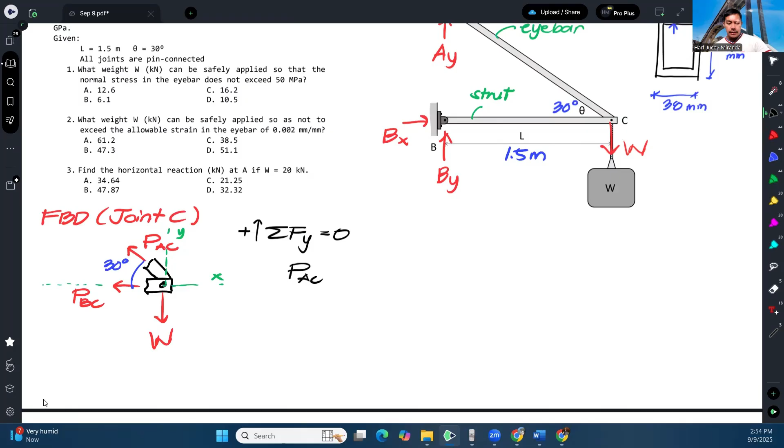Okay, so lagyan natin ng axis. Ito yung Y. So, here, dahil yung system of force niya is concurrent system lang, we can just apply summation of forces. Taking summation of forces, unahin ko na yung Y is equal to 0 kasi masasolve ko na kagad yung AC. So, we have PAC sine of 30 minus W is equal to 0. So, therefore, W is equal to PAC sine of 30.

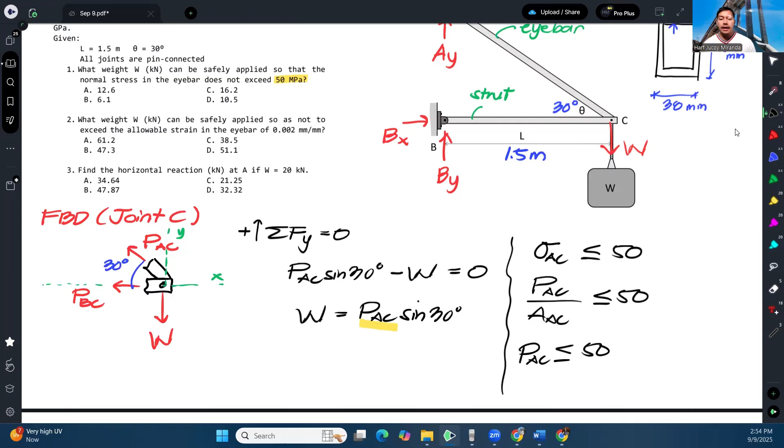Ano ba yung area? Kung babalikan natin yung cross-section, since 3 mm yan, we can define this height, yung inner area. So 76 minus 3 minus 3, that is 70. While ito naman, 38 minus 6, so 32. So ang area nung cross-section ay 76 by 38 minus 70 by 32.

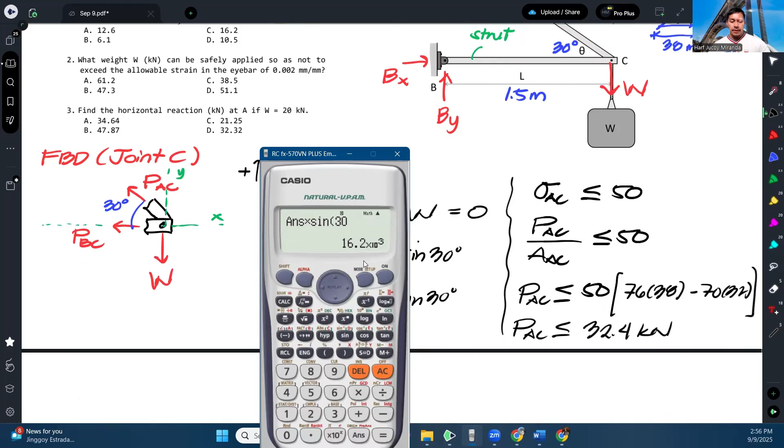And that gives us the maximum allowed force in eyebar AC. So that is 50 times 76 times 38 minus 70 times 32. That is in Newton; in kilonewton, that is 32.4. So dapat hindi lalagpas yan yung force sa AC para hindi ma-exceed yung stress na 50. So therefore, W will be 32.4 times sine of 30. So W should be limited to 16.2 kilonewtons. And that would be our answer for number 1.

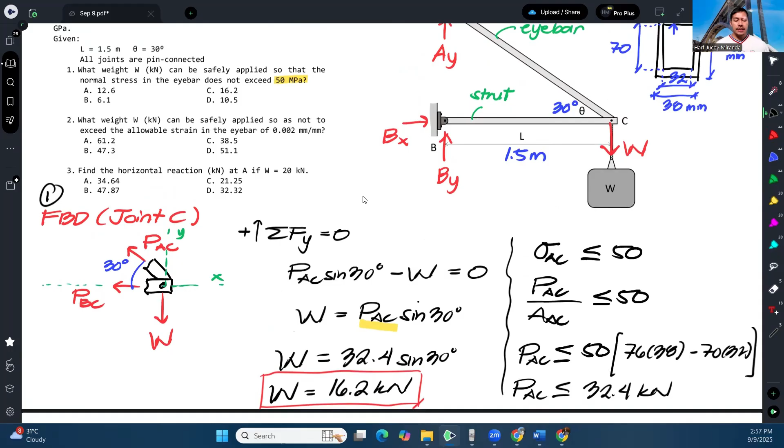Okay? Number 2, what weight can be safely applied so as not to exceed the allowable strain in the eyebar of 0.002? Ano daw yung maximum weight para yung strain dun sa eyebar hanggang 0.002 lang. So strain ni AC is limited to 0.002.

So once again, ano ulit yung strain? That is the deformation over the length. Kapag sinimplify, deformation ay PL over AE, over L, magka-cancel lang yung L. So the formula for strain can be derived as P over AE. Kung gagamitin ko tong strain ni AC, dapat hindi yan lalagpas ng 0.002. And from here, we can once again define ano dapat yung force sa AC.

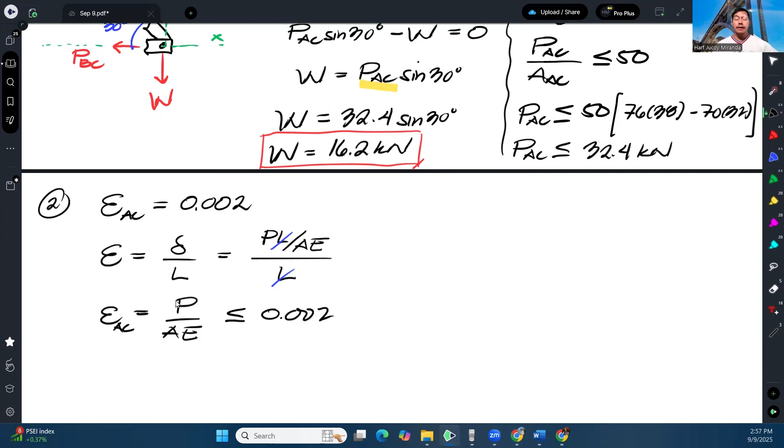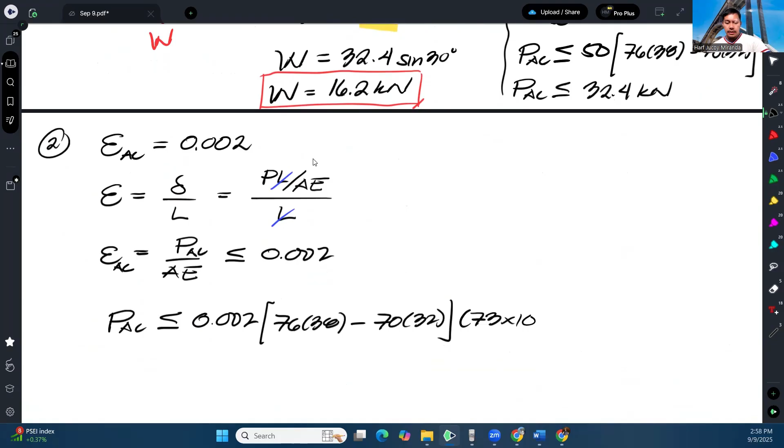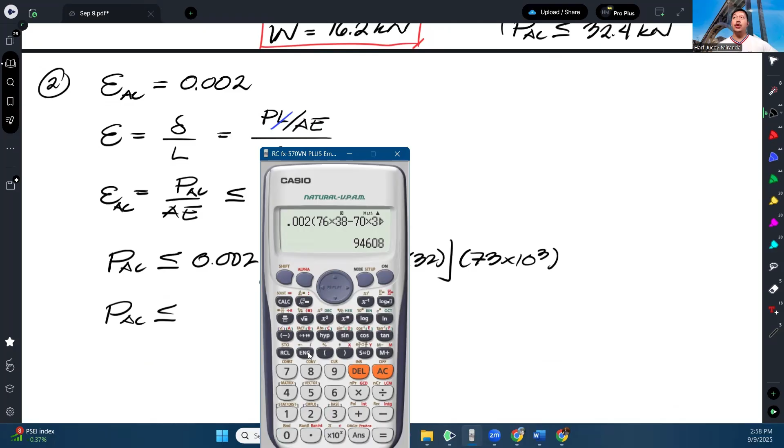So, yung force sa AC should not exceed 0.002 times area times E. Yung E na binigay ay 73 gigapascals, so 73,000. So PAC should not exceed 94,608 Newton, or in kilonewton, that is 94.608 kilonewtons.

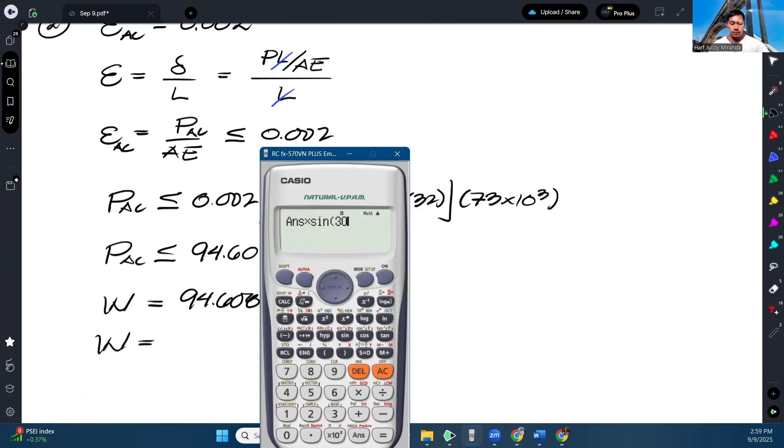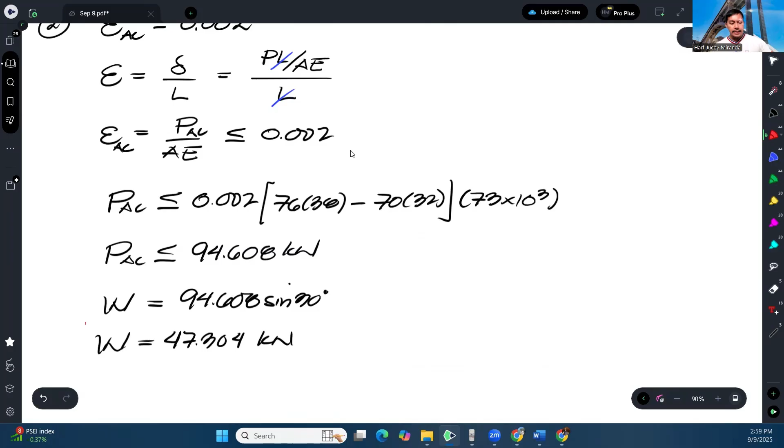And para masagot ulit natin yung W, ito pa rin yung relationship. So therefore, W is equal to 94.608 times sine of 30. So W must be limited to 47.304 kilonewtons. So that will be our answer. Yung una, 16.2.

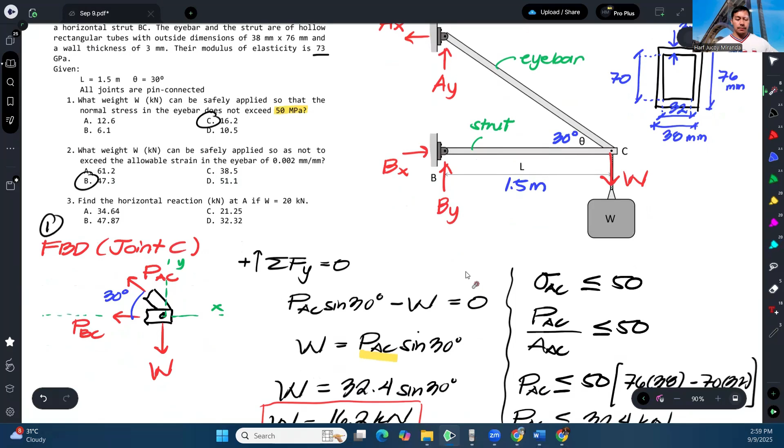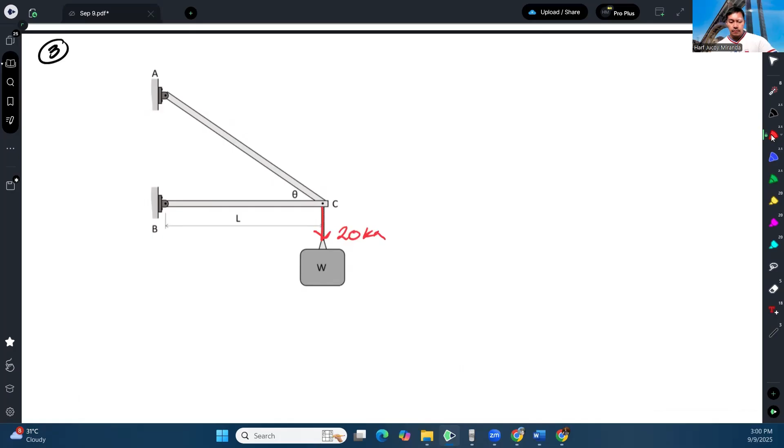Now, for the third question, find the horizontal reaction at A if W is equal to 20 kilonewtons. So, ano daw yung horizontal reaction sa A? Ito, hinahanap to. Ang binigay sa atin is what if yung W is 20? So let me just have another figure for number 3. Let me use the entire structure. So, ito, 20. So again, meron ditong reaction.

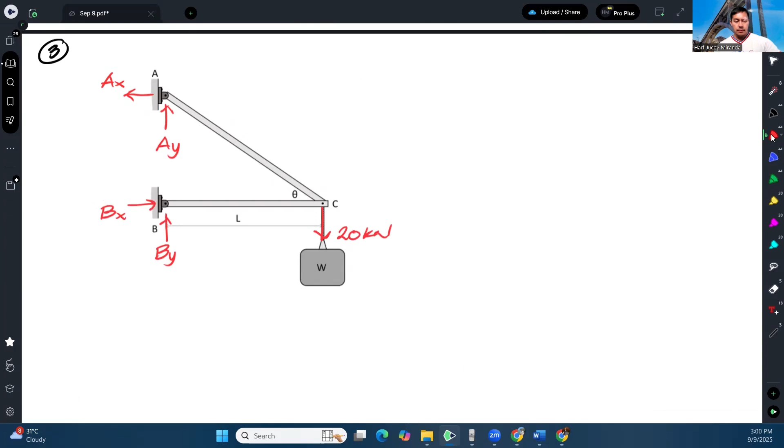Okay, and then this measurement is 1.5 meter. This is 30 degrees. So napakasimple lang ng tanong sa number 3. We can just solve for this reaction kasi di ba sabi niya horizontal reaction eh. So meaning sa case natin yung AX.

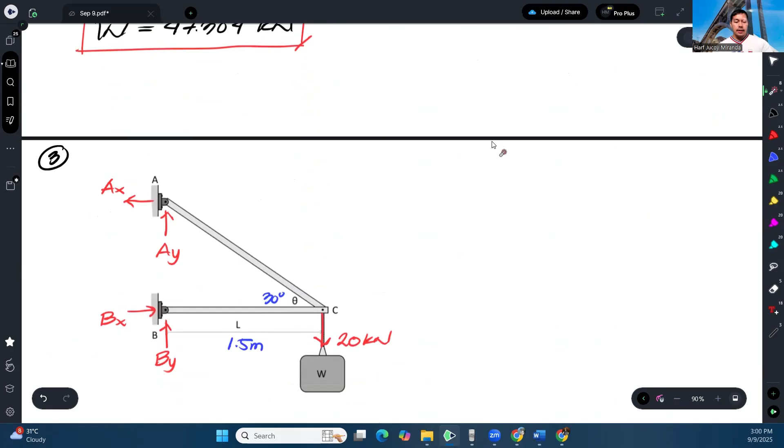Okay, so para makuha yung AX, if you look at the figure, pag nag-moment ka sa B, kuha mo na kagad to, di ba? So pag nag-moment tayo sa B, iikot to. Ang moment arm mo ay ito. And then iikot to, ang moment arm natin ay ito. So kailangan pala natin to. Yan. Tawagin kong Y. So para makuha yan, we can just consider this right triangle.

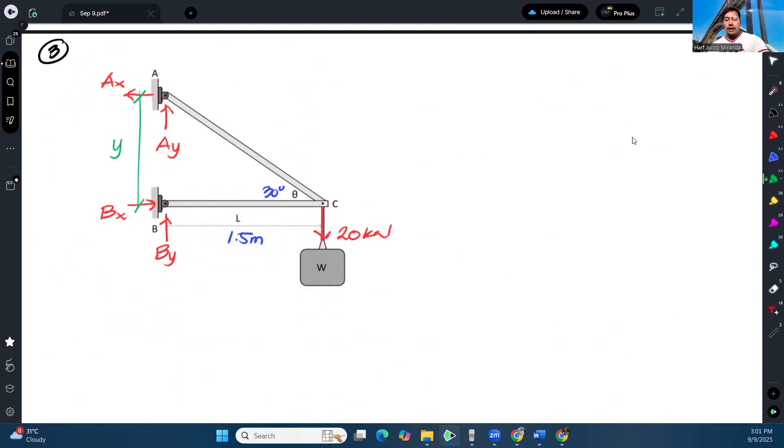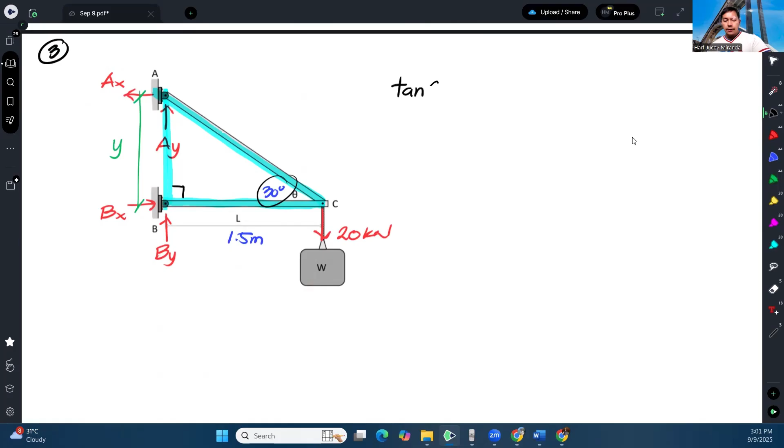That's a right triangle. And may angle ka naman. So you can apply tangent function. So tangent of 30 would be equal to Y, opposite over adjacent. So Y is 1.5 tangent of 30. So kahit wag na natin computein. So now we are ready to take summation of moment at B to directly solve for the reaction AX.

So taking summation of moment at B is equal to 0, assuming counterclockwise positive. We will have AX. Ang moment arm niya is yung Y, which is 1.5 tangent of 30. That's counterclockwise. Minus 20 times 1.5. That is clockwise. And that is all equal to 0. So therefore, AX can now be calculated.

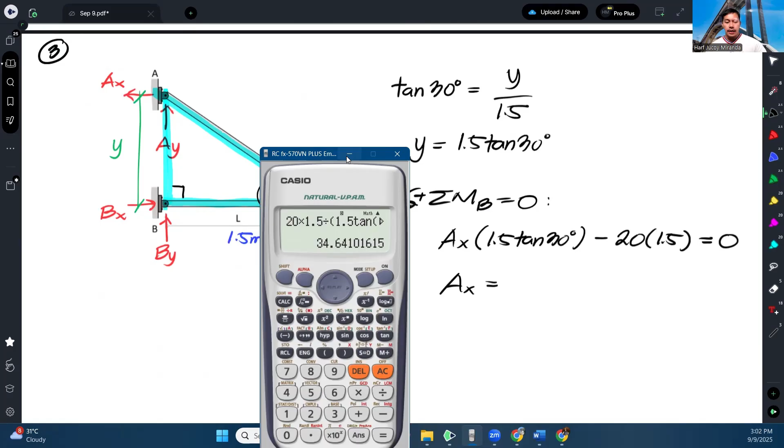And this gives us 43.30 kilonewtons. Sorry, hindi pala. Pag naging 1.2 to. 1.5. So this gives us 34.64 kilonewtons. Okay? And that is letter A.

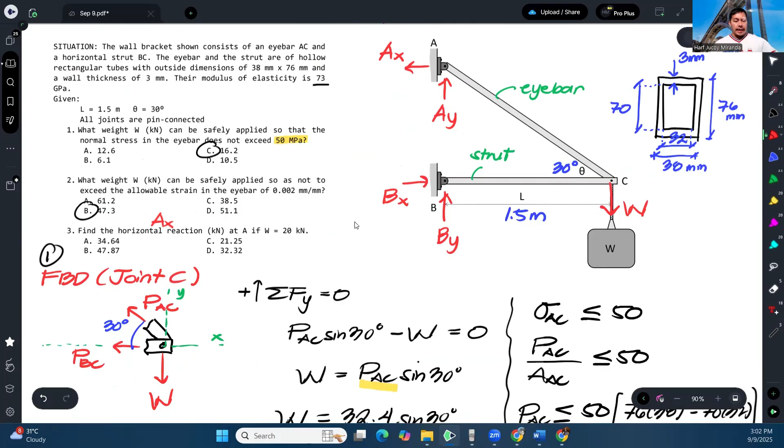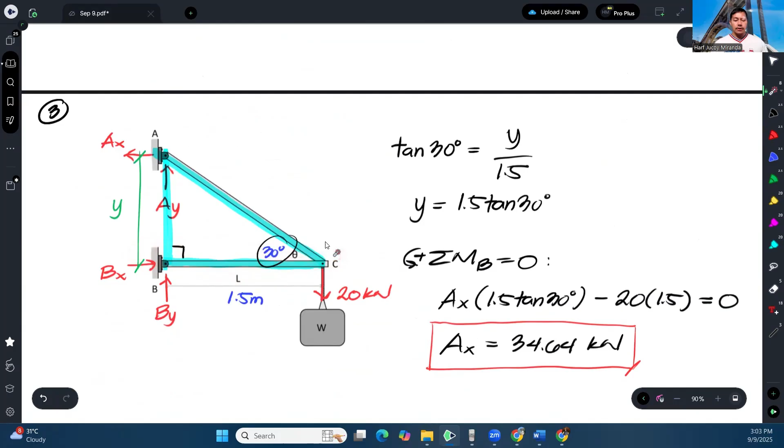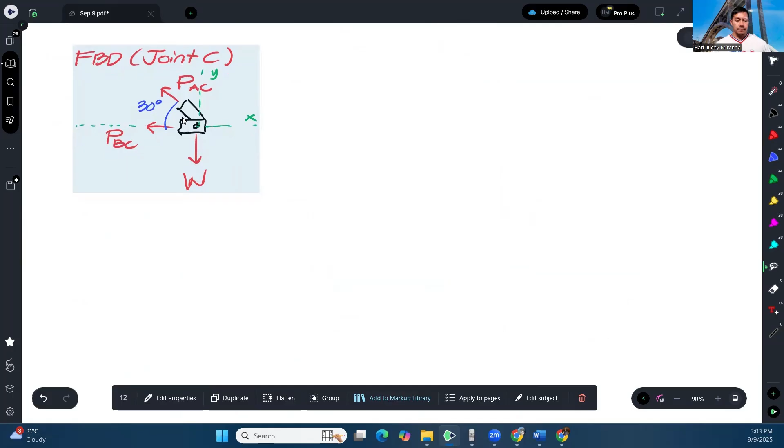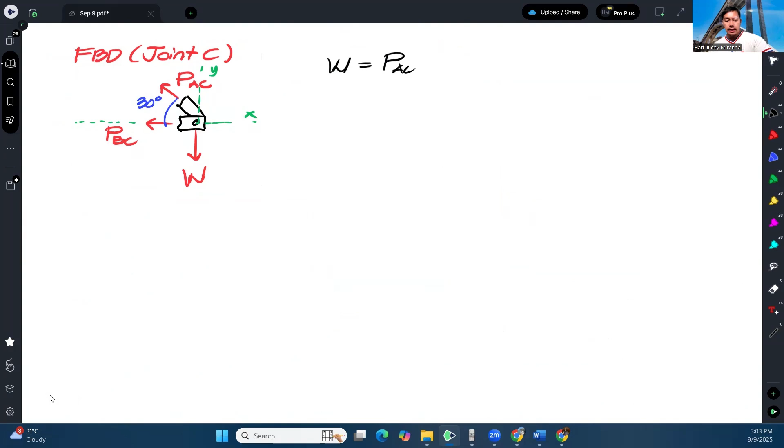Now, gusto ko lang din ipakita, hindi kasi natin na-analyze dito itong member na to. Pero paano kung kinompute din itong member na to? So going back dito sa relationship na to. Let me just copy this. Okay, so we already established that W is equal to PAC sine 30. So that means that PAC is W over sine 30. Diba? Ngayon, kapag nag-summation of forces naman tayo sa X, pakita ko lang.

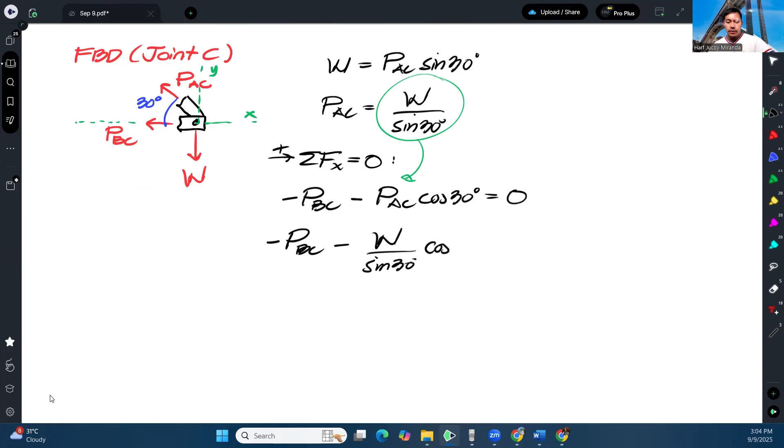So we have negative PBC and then we have negative PAC cosine of 30 equals 0. Tapos kapag sinubstitute natin to dito, magiging negative PBC minus W over sine 30 times cosine 30. And from here, solving for PBC, that will give us negative W cosine 30 over sine 30. So the negative sign here indicates the wrong direction. So ibig sabihin, ang tamang direction ng PBC ay ganito. Ganyan.

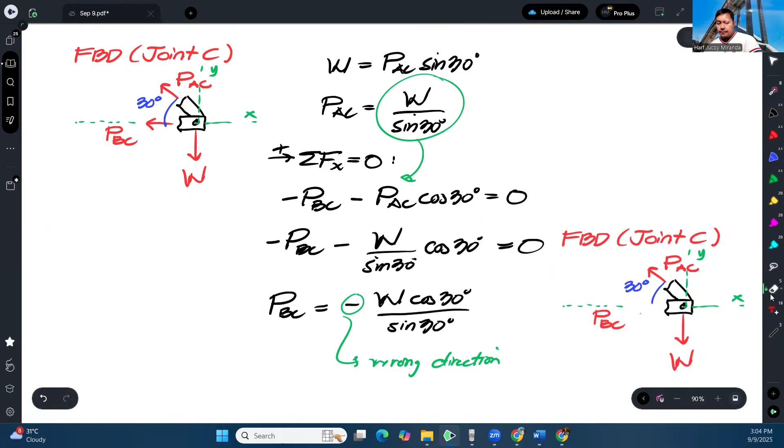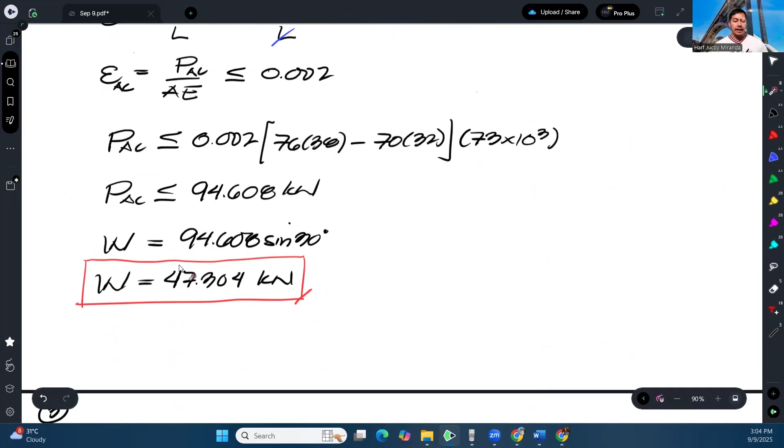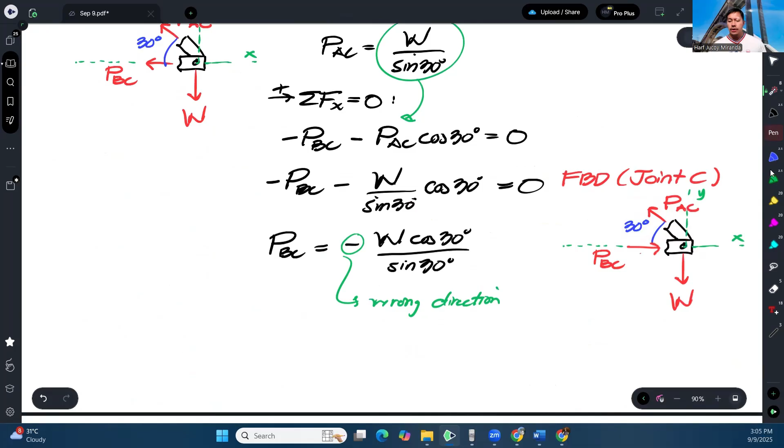Okay? So, looking at the members AC and BC, mapapansin natin na si AC ay tama naman yung naging direction niya from earlier. What I meant was, positive naman yung nakuha natin na PAC pag sinolve mo. So tama yung assumption natin na ito ay away from the joint. So meaning itong member AC is subject to tension, while si BC is in compression.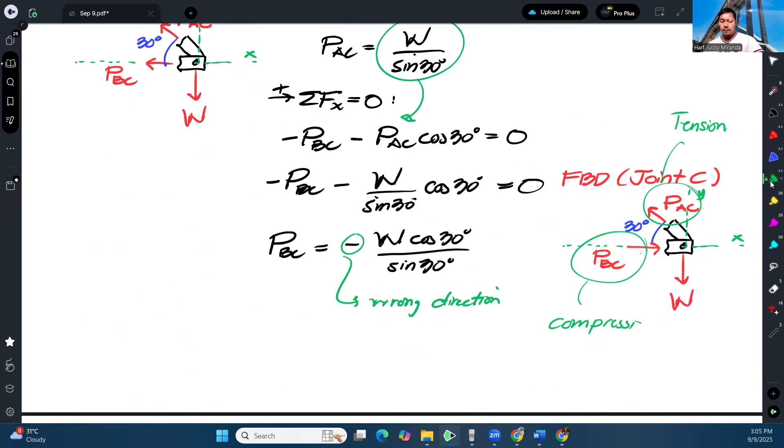Okay, so going back sa original na figure, lumalabas pala ito na tension ang nararamdaman, while ito naman, compression. Kasi may mga instances na bibigyan tayo ng mga allowable stresses na magkaiba. Bibigyan ka ng allowable stress sa compression, tapos iba din yung allowable stress sa tension. So kailangan mong malaman muna yung nature ng actual stress ng member na yon para malaman mo kung ano yung dapat mong gamitin: allowable stress sa tension or sa compression.

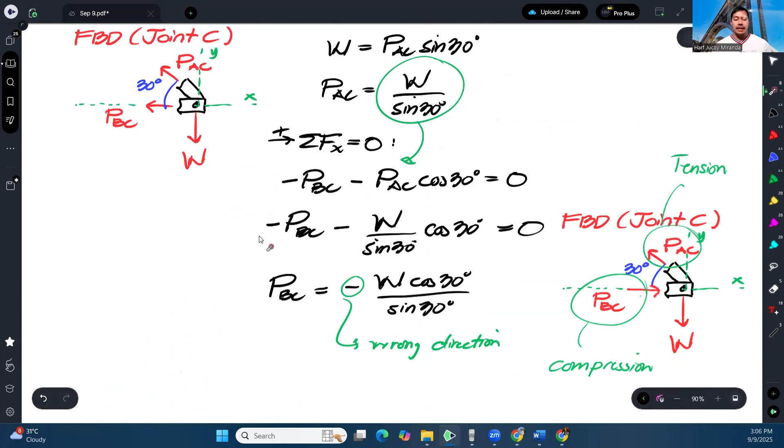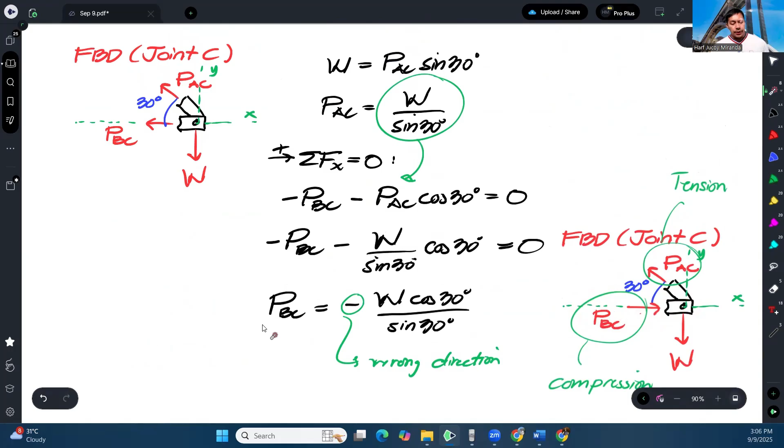Okay? So we have to also identify that. Yun lang yung gusto kong sabihin dito, kasi sa item na to, hindi natin napag-usapan yung isang member. So that's for BC. And then another point I would like to raise is itong member AC is actually an example of a two-force member. Actually parehas silang two-force member.

So pag sinabi nating two-force member, hindi ibig sabihin dalawa lang yung force. Mali yung ganoon na definition. Ang ibig sabihin talaga ng two-force member ay sa member mo, dalawang points lang merong forces, at yung resultant ng mga forces na yon will coincide or become collinear. So pakita natin. Let's say yung member AC.

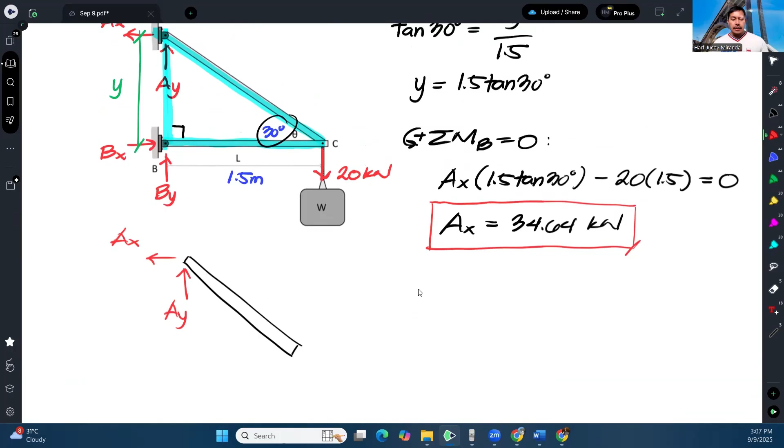So alam natin na si member AC meron ditong reaction AY, tapos meron din dito AX. And pin support din to nandito, so malamang meron din ditong reactions, CY tsaka CX. So ito yung sinasabi ko na two-force member. Hindi ibig sabihin na dalawa lang yung force nag-act sa body. Ibig sabihin, dalawang points lang yung meron kang forces. Ito lang, tsaka ito. Itong dalawang to, pwede naman makombine.

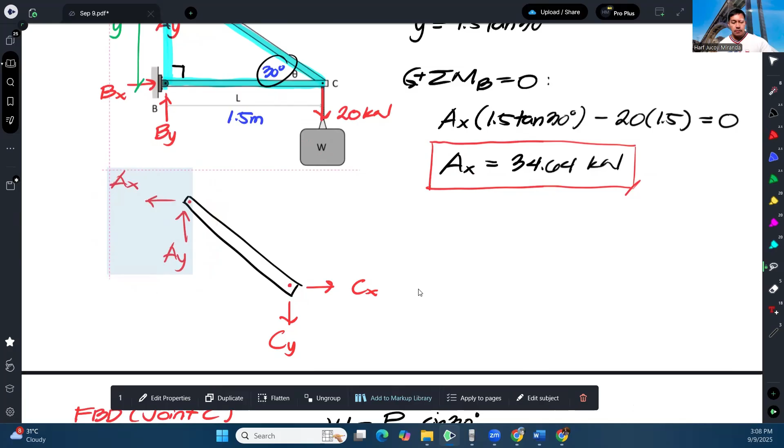Lipat ko lang to. Yung AY, lagay natin dito. So yung AX tsaka AY, pwede mo makuha yung resultant nila. Reaction sa A. Tapos ganun din si C, pwede mo makuha yung resultant niya. Reaction sa C. And dapat ito mag-coincide. So that is what we call two-force member. Minsan nakakatulong na kapag na-identify natin na two-force member siya, mas dumadali yung analysis.

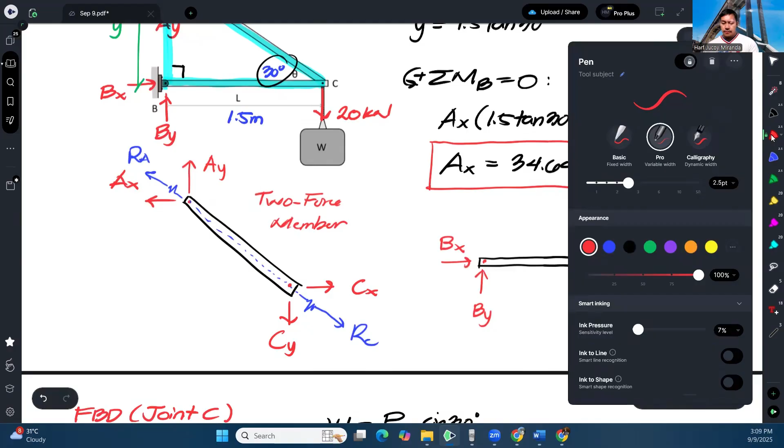So yung member BC, two-force member din yan. Dito meron tayong BY, tapos meron tayong BX. Tapos dito, meron tayong reaction sa C. Dito, inassume ko na downward siya, so dito pa-upward na siya. Tapos yung CX natin, to the left. And maliban dyan, pwede nating ilagay kay member BC yung weight, yung W. Nandito rin yun.

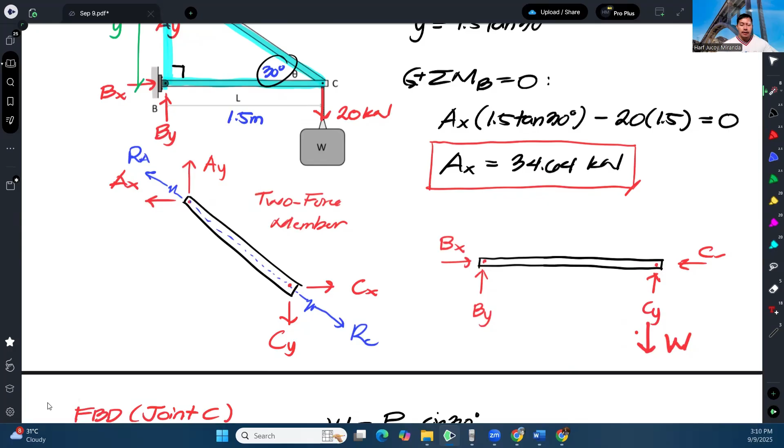Alright? So as you can see, lima yung forces acting on this member. Pero they are all acting on 2 points. So that's why this is also a two-force member. So that's the idea ng two-force member. Anyway, that's how we solve this problem.